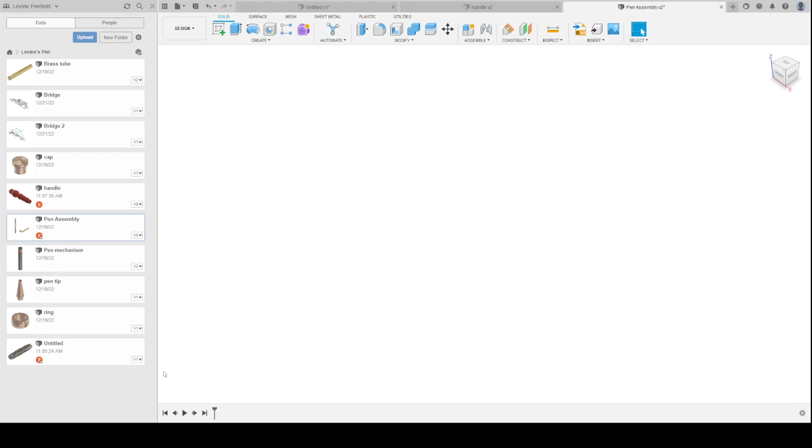So for creating an assembly, I've made a new design in my project folder for my pen, and I'm going to bring in basically all my parts. It doesn't really matter where you put them, they're just coming in to this file. So that'll be your handles, let's say pen tip, mechanism.

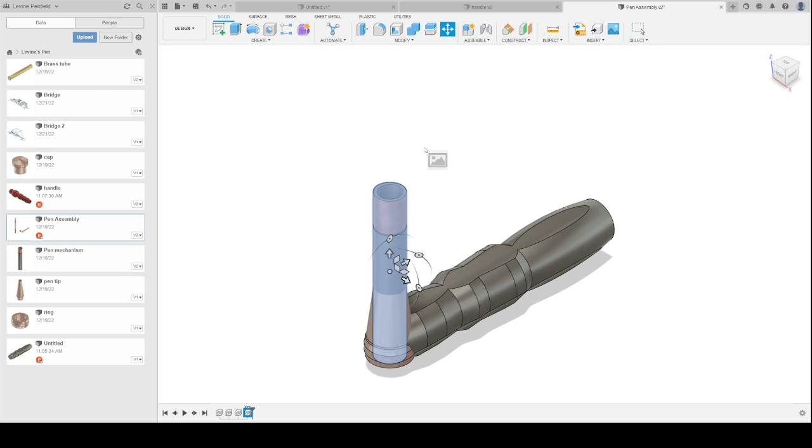Here's one of my handles. I'm going to bring in the brass tube twice because I have two of them. And I'm not going to do the whole assembly. I'll do a bunch of it just to show you a couple of points that are worth looking at.

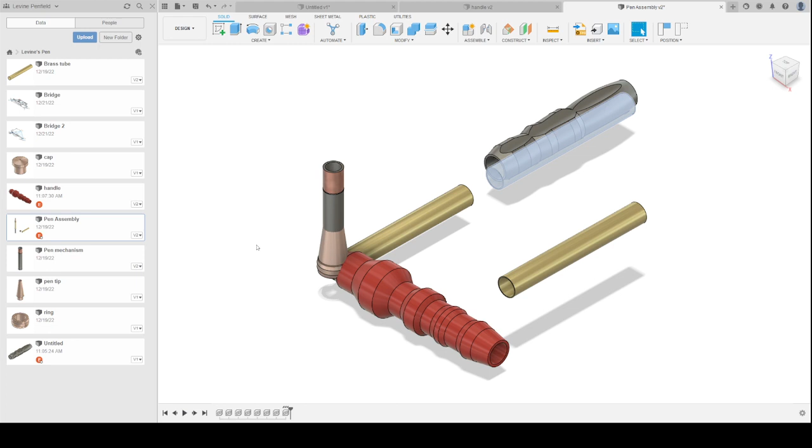Okay. So I got two brass tubes. Oops, I actually got three brass tubes. So I don't need this last one. I'll delete it. Okay. So here's my pen mechanism, pen tip, ring. I don't have the clip or the cap here right now, and that'll be fine.

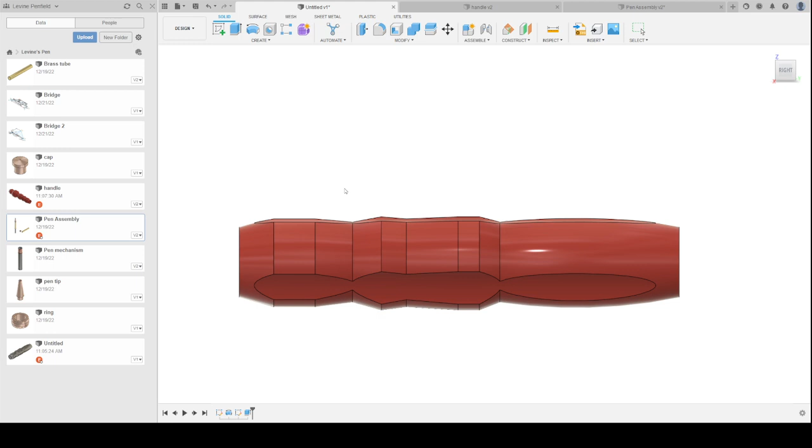Now if you do find you have a part that doesn't look right, go back to the project file, update it, save that part. Then when you come back to your assembly, it'll give you an error message. Up at the top is where you can just click on that button and it'll tweak it. And in this case, that tweak was the color change.

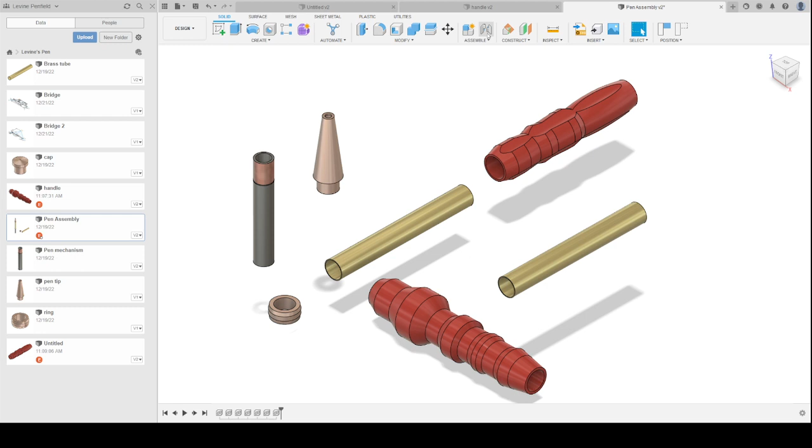So the way the assembly is going to work is we're going to create these joints that are just going to tell it to lock certain points in position with other points. So that's found sort of up in the middle under assemble. There's a joint button, and I'm going to make sure I'm selecting very specific aspects.

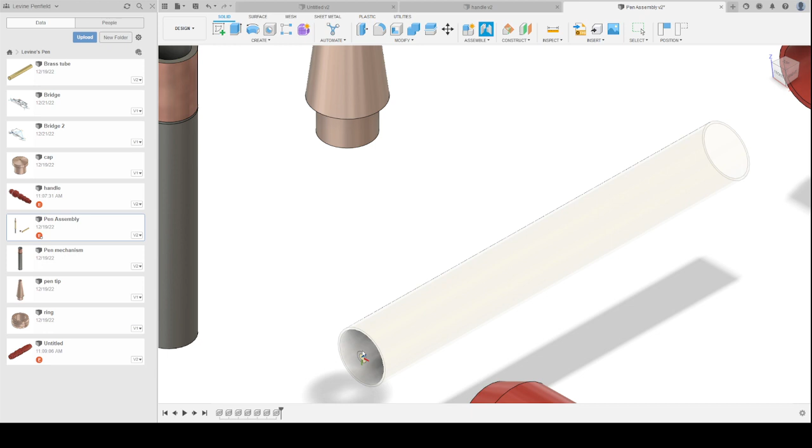So for this brass tube here, I want to make sure it's on the plane of the opening of the brass tube that I'm selecting, because that is where it's going to get eventually squeezed up to here on the pen tip. So down here is not where it goes. Where that part of the pen tip goes is actually going to get sandwiched all the way up to here.

Now if it goes on kind of goofy like that, we can always just flip it so that it's oriented in the way that we need. Once that looks good, you can say OK, and that's where it fits.

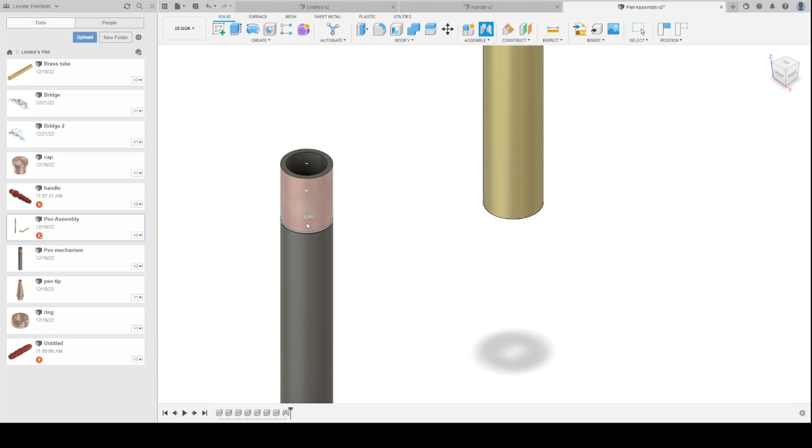Something like the mechanism, where you're actually having it go only part way through, I can put the joint on it, so I actually want it to go from the middle here. You can see the blue, red, green axes there, so that point I want here. And I can say OK.

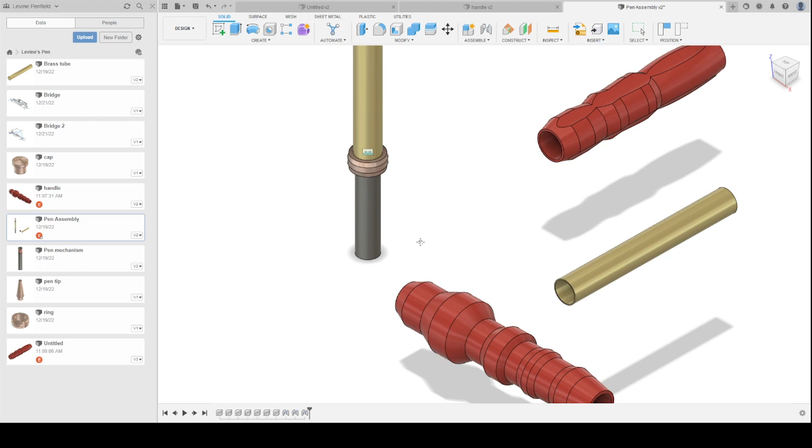I'll also stack on the pen ring to there, and then the brass tube to the end of that. Now onto the back of this. Oops, that's backwards. Onto the back of this whole mechanism, you'll have the pen clip and the pen cap.

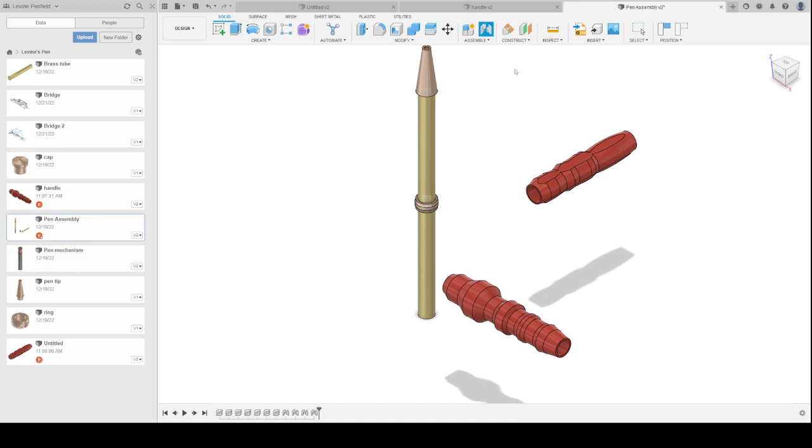They'll go here. If you did everything right, these handles should line up right on top of the brass tube. Whoops, I'm gonna flip. And it should all line up. Now why isn't mine lining up? That's where I can go back into that part. This was an older piece that I did, and modify it.

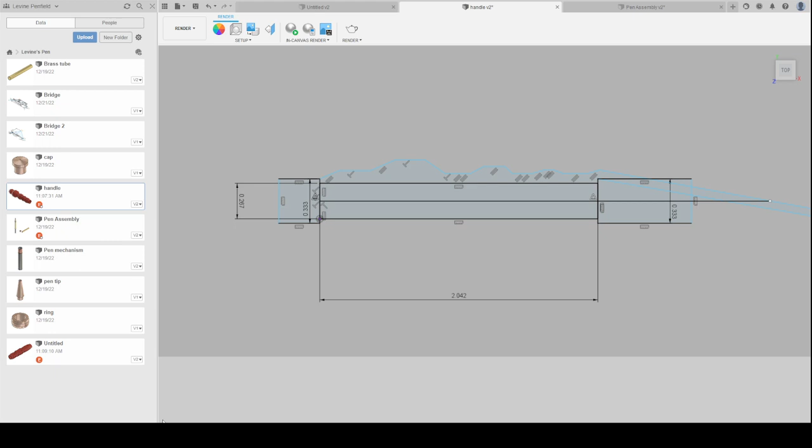So that's 2.42. That was not the length. It's 2.0. Let me pull out my dial calipers. I have 2.042. And I can say finish sketch. It's probably going to have an issue because I revolved something that's not there anymore.

And this is where you might have to bounce back and forth. So I can look on my timeline and change my revolve. So my timeline down at the bottom here. Because the shape that I revolved went, I don't know what even happens there. So something went wrong, something went awry. So I'm going to edit this pen.

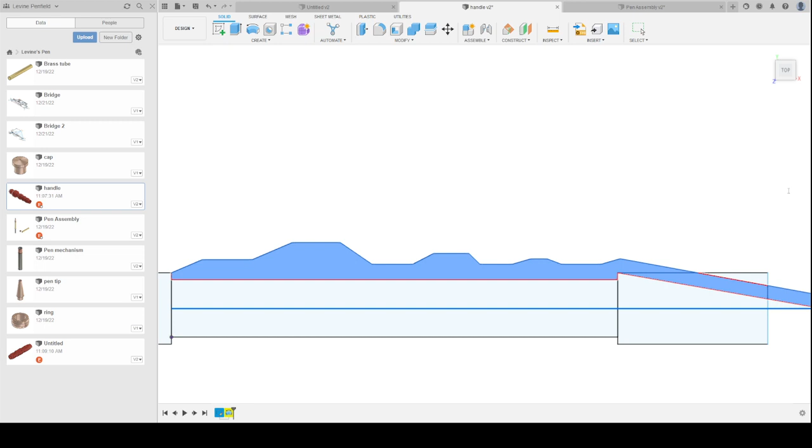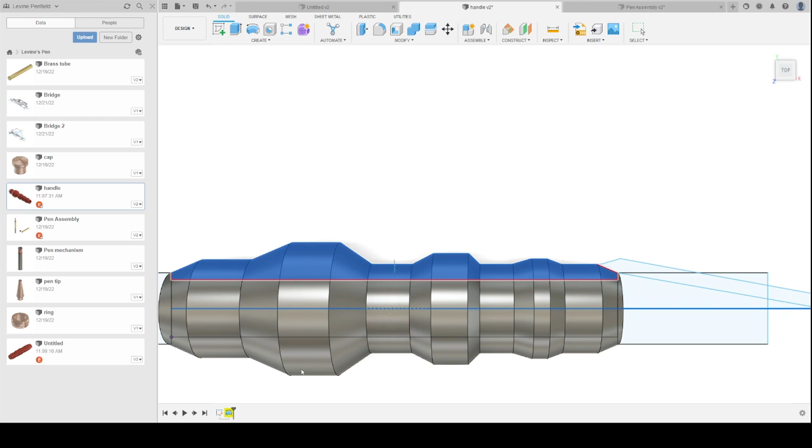Oh, I need to change the sketch. Okay, so my sketch needs, I need it to come down to here. I can do like that. So now that's just going to end there, and I'll not revolve the rest of that. So if I go back to my revolve step, I'll deselect that stuff. I don't know what's going to go on with it. That's fine. I'll say OK. It kept the red. So now I'm hitting save, going OK.

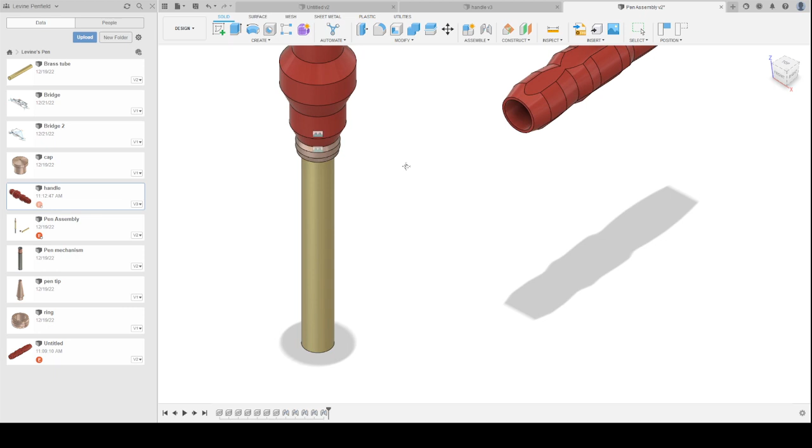I'll go back to my assembly. It should give me an error message now. You got a little yellow triangle. I can click on that update button on the top, and now it fits perfectly. So you might have to bounce back and forth in case you measured something wrong, but this is how you can self-check if you measured the parts correctly. And hopefully you did, and everything lines up perfectly and wonderfully.

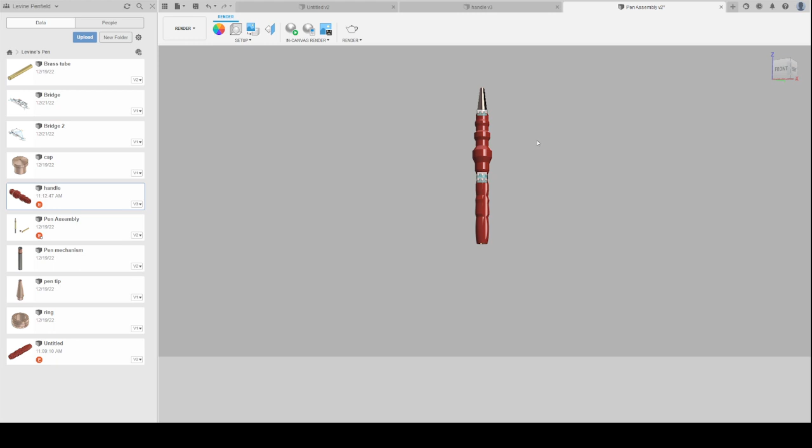When you get to this part, you'll add the pen clip and then the pen cap there as well, and you should get more or less what the final view of your pen should be. Now remember, for me, I'm going to have you make 2 versions of the pen and render both of them, but ultimately you're going to pick one of those to 3D print and assemble.

But the biggest part of this is being able to go back and change things if you need to, and the assembly button, or the joint button, which is under the assembly section of the ribbon at the top of the design tab. So that is the assembly of the pen. Detailed instructions on how this goes together can be found in the instruction book that comes with the pen kit that each of you were given. Please let me know if you have any questions.